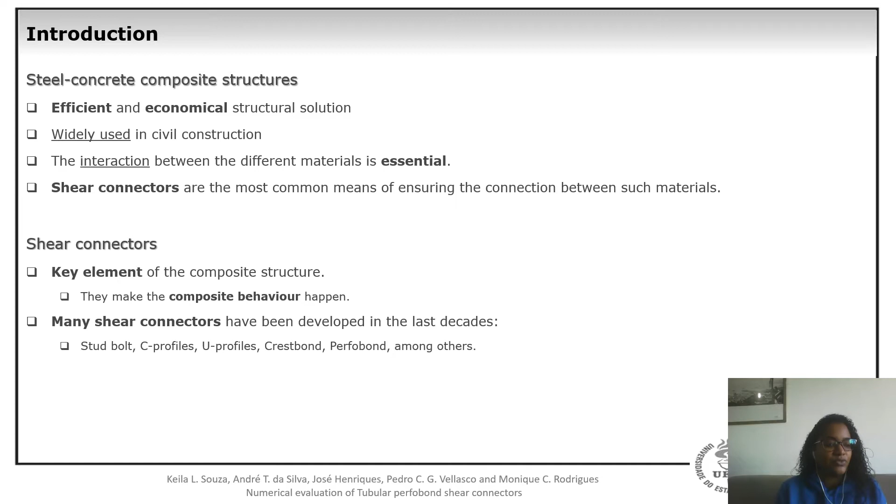They are key elements of composite structures, as they make the composite behavior happen and minimize the slip between the materials. These connectors, which must resist the relative slip and uplift between the concrete and the steel, can have different geometric shapes. Many shear connectors have been developed in the last decades, such as stud bolts, C-profiles, U-profiles, crestbond, perfobond, and C-perfobonds.

The perfobond connector was conceived and has stood out. It is known to have greater rigidity and resistance, however sometimes it doesn't present adequate slip capacity. There is a need for an alternative connector to the perfobond that can achieve adequate slip capacity, as recommended by Eurocode 4.

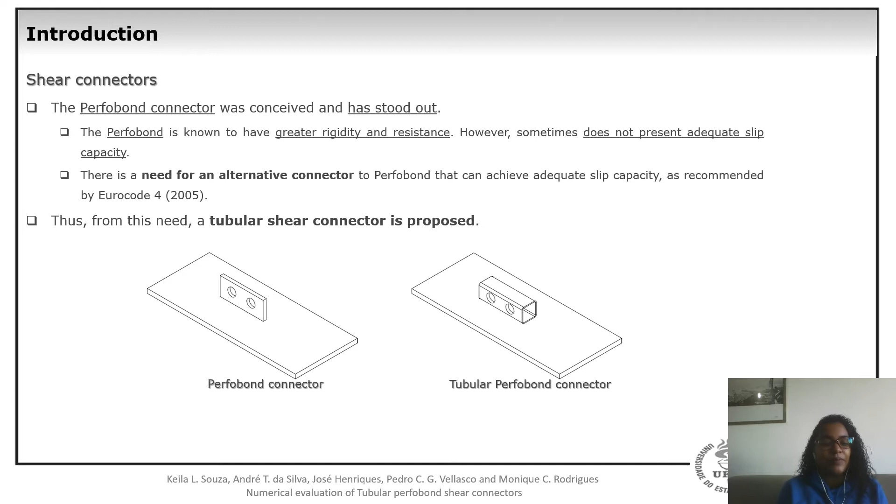Thus, from this need, a tubular shear connector is proposed. It is expected that a tubular cross-section can optimize the connector performance, and the proposal is that the concrete confined inside the connector provides a greater slip capacity when compared to the regular perfobond connector.

As no results of a connector similar to the one proposed here were found in the literature, a validation of the numerical model will be carried out from the results of the perfobond connector of Vianna, in order to validate the model choice. Among all the models studied by Vianna, the perfobond connector with two holes was chosen for the numerical validation.

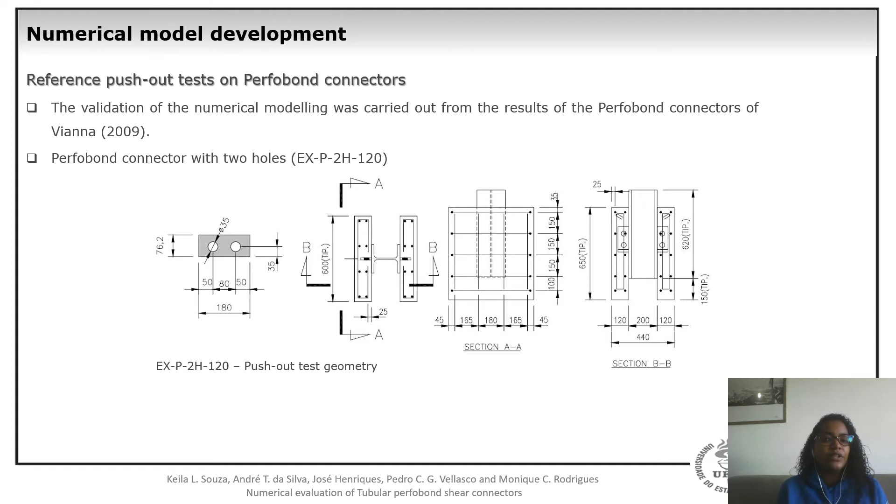Development of the numerical model. The study was performed in Abaqus 6.14, and the explicit solver was used to conduct the nonlinear numerical analysis.

About the geometry, the experiments performed by Vianna were based on Eurocode 4, and all components were modeled with solid elements. The load was applied by displacement on the I-profile section upper face, and the boundary conditions were defined as restrictions to the displacement in the three directions of the global axes.

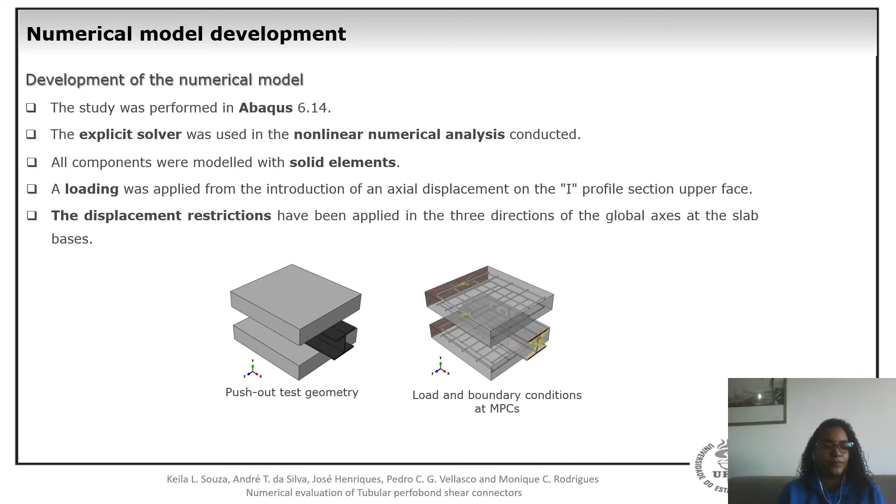About constraints and interactions: the embedded constraint was applied to simulate the interaction between the reinforcement bars and the concrete. The tie constraint was applied to simulate the weld between the shear connector and the steel beam. The normal hard contact and the tangential contact behavior were applied to avoid overlapping between the parts during the simulation.

About the mesh, all the components of the model were discretized with 3D elements of type C3D8R, with an overall size of 5 mm for the shear connector, 24 mm for the reinforcement bars, and 8 mm for the slab and steel beam.

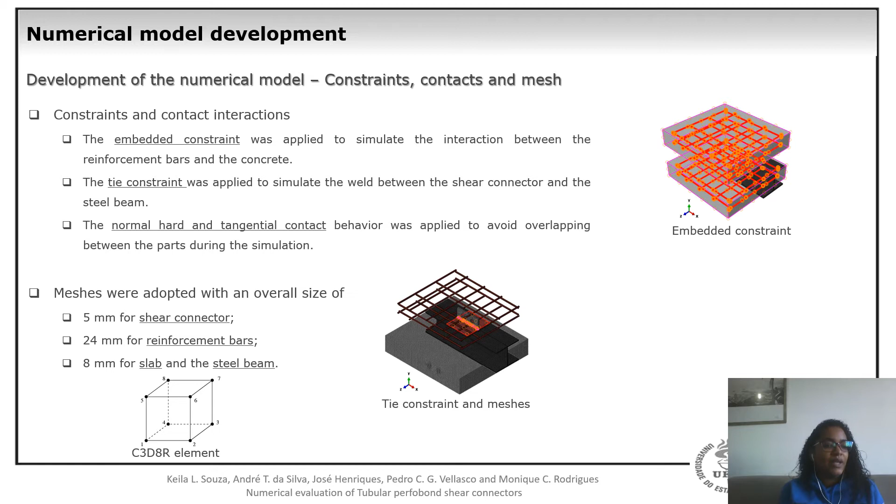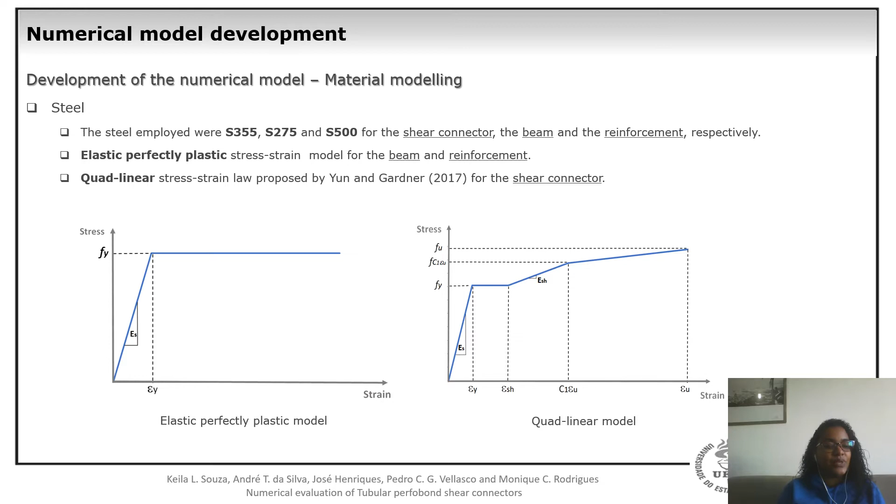The elastic perfectly plastic stress-strain model was applied for the beam and the rebar. The quadrilinear stress-strain model was applied for the shear connector. The concrete was modeled using the concrete damage plasticity model.

The concrete strengths employed were 28 and 52 megapascals. The constitutive model proposed by Pavlovic was adopted to characterize the behavior of concrete under compression, and the bilinear tensile model recommended by Model Code was adopted to characterize the behavior of concrete under tension.

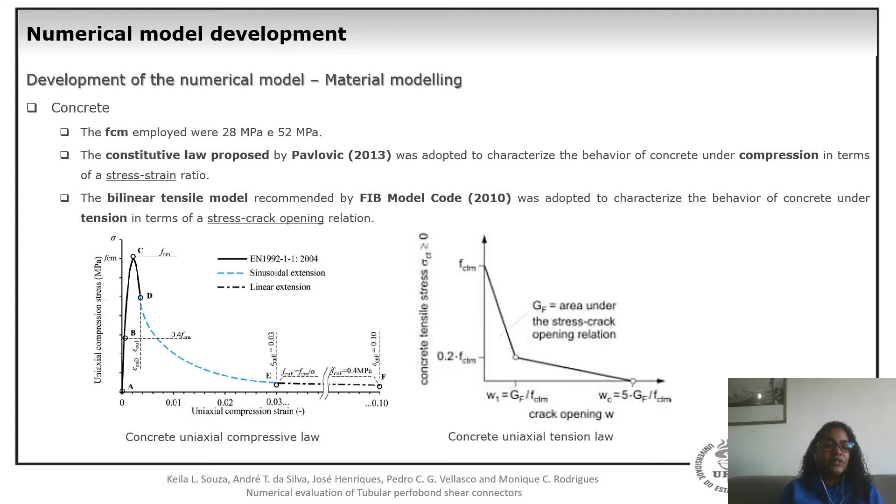Analyzing the validation results, two models of the perfobond connector with two holes were analyzed with 28 and 52 megapascal concrete. About the models, NUM is used to indicate that they are numerical models, and EX that they are experimental models.

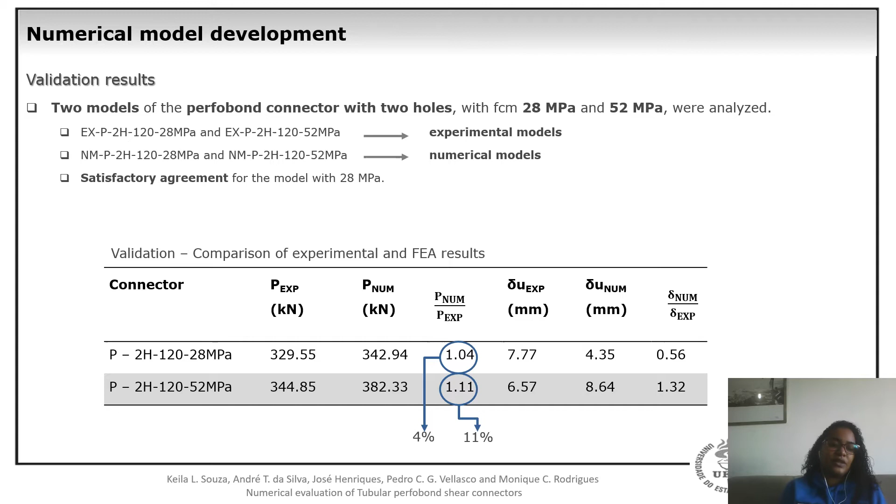The numerical model with 28 megapascal presented an ultimate load 4% higher than its experimental counterpart. The 52 model obtained a 11% higher ultimate load when compared to the experimental one. So there is a satisfactory agreement for the model with 28 megapascal, and this numerical model presented an initial stiffness similar to the experimental one.

After reaching its peak load, the numerical model lost stiffness faster, which justifies the lower slip capacity. The 52 megapascal numerical model lost stiffness lower in the post-peak segment, resembling the experimental one. The 28 model was validated in terms of peak load and the 52 in terms of post-peak behavior, but it is important to mention that other studies are needed to improve the validation.

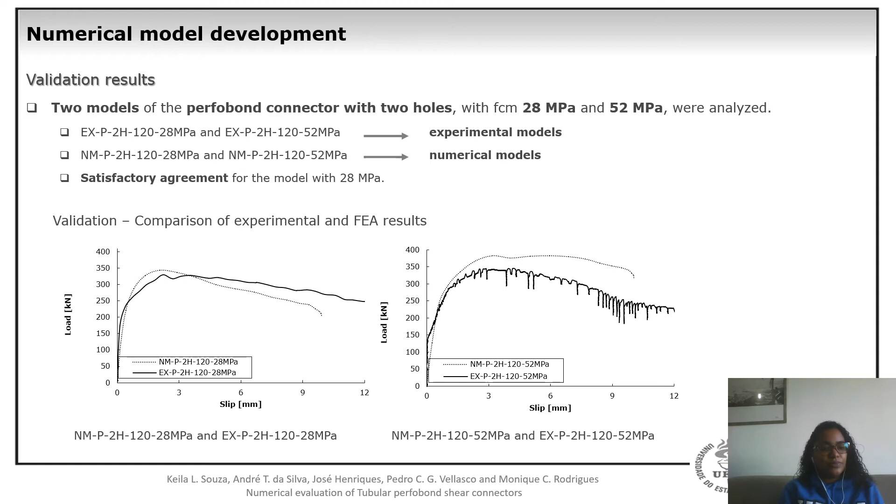Evaluation of tubular perfobond connector.

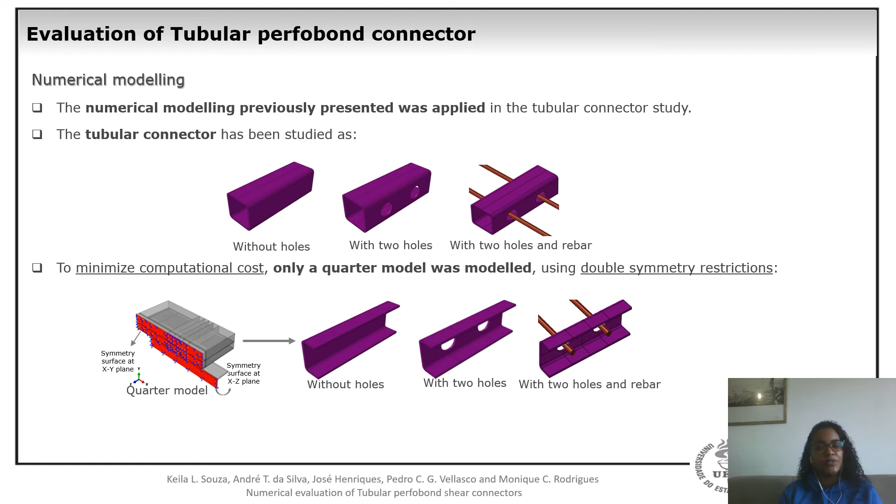The numerical model shown before was applied in the tubular connector study, including materials, constraint, contact, boundary conditions, mesh, among others. The tubular connector has been studied as without holes, with 2 holes, and with 2 holes and rebar. To minimize computational costs, only a quarter model was modeled using double symmetry restriction. Two concrete strengths were studied, 28 and 52 megapascal. The influence of the hole and the rebar were also evaluated.

About the models, the TP index indicates tubular perfobond. The NH denotes that the connector has no hole, 2H denotes that it has 2 holes, and PR denotes that it has a rebar. 28 and 52 megapascal indicate concrete strength.

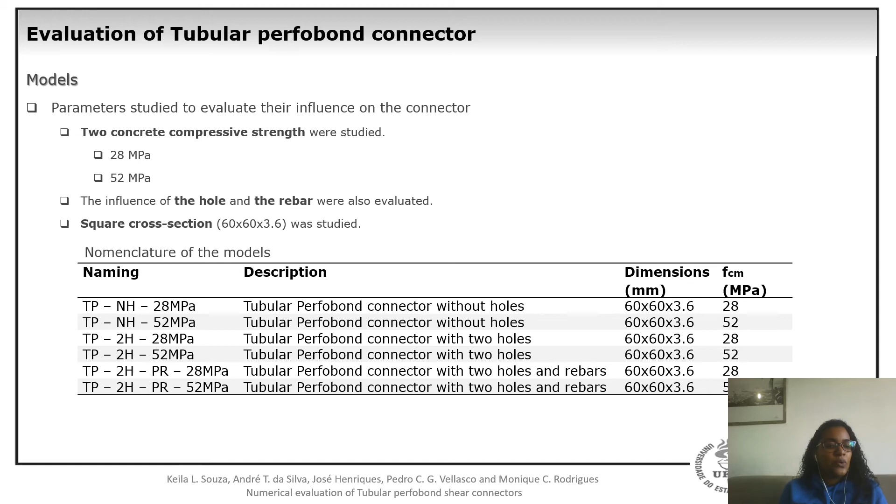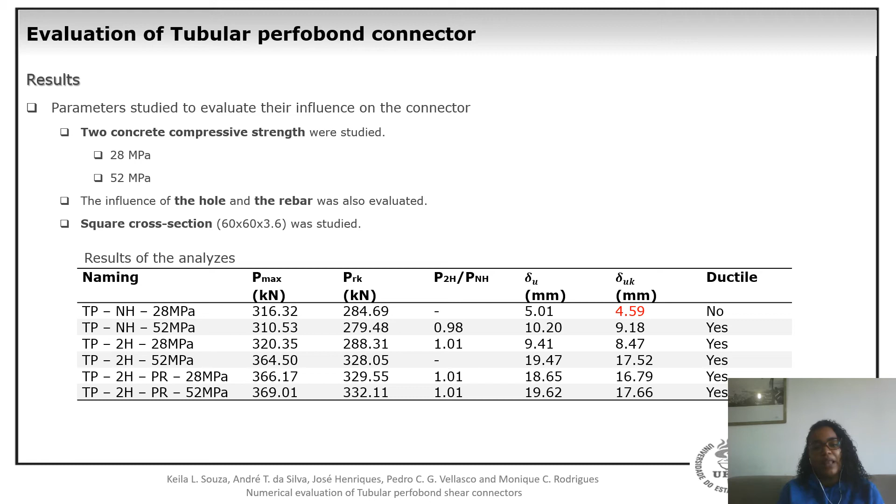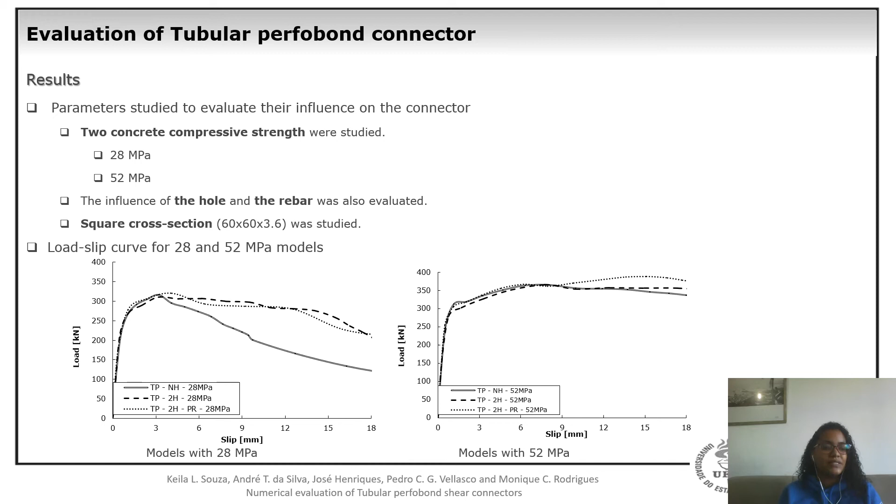About the results, all results were taken according to Eurocode 4. About ductility, Eurocode 4 defines that the shear connector is ductile if its characteristic slip capacity is at least 6 mm. Thus, only the first connector without holes were not ductile. The use of the holes and the rebar led to increasing the shear strength of the connectors. With the exception of the no-hole with 28 megapascal, all models exhibit ductile behavior after the ultimate load.

The use of the hole and the rebar conferred a discrete increase in the resistance. For all models, it led to connector peak load equal or higher values. The increase of the concrete strength resulted in an improvement of the shear connector strength for the different case studies, ranging from 15 to 18%.

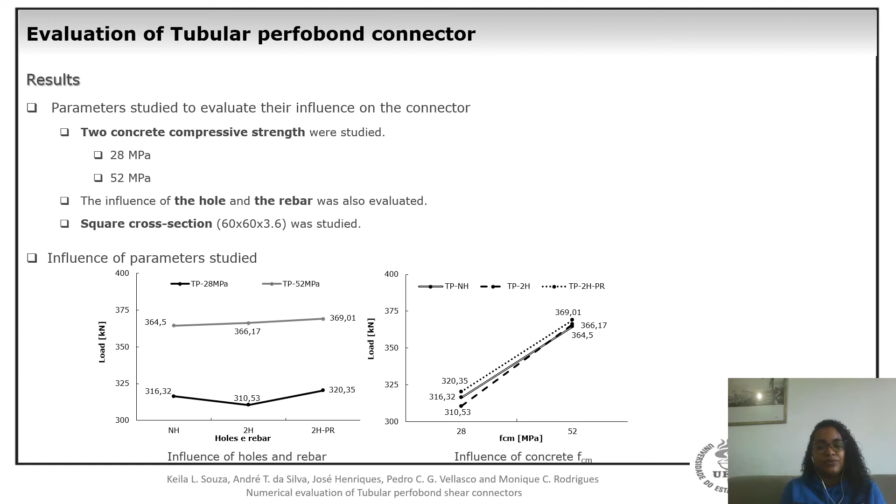There was an expressive increase in the slip capacity of the tubular shear connector due to the rise in concrete strength. The variation in the strength of the concrete didn't influence the steel yielding, only the concrete crush pattern.

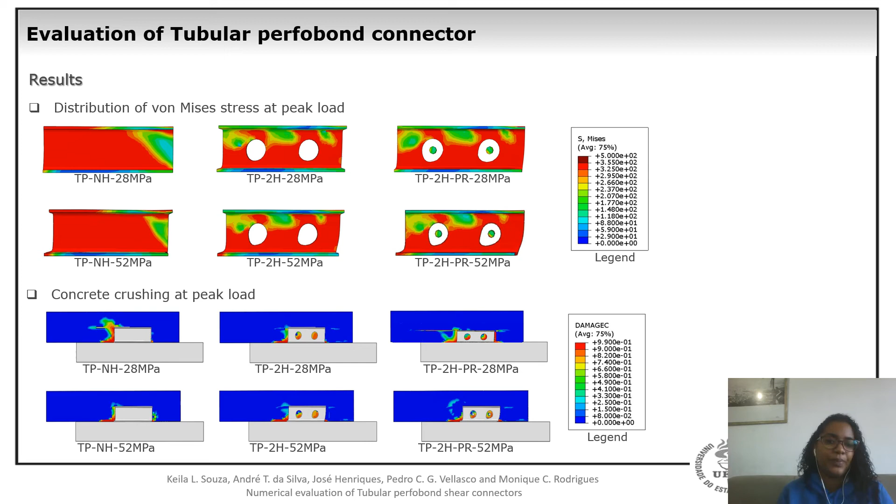Tubular perfobond connector versus perfobond connector. About slip capacity, the proposed connector presented 182% more than the perfobond connector for the model with 28 megapascal, and 98% for the model with 52 megapascal.

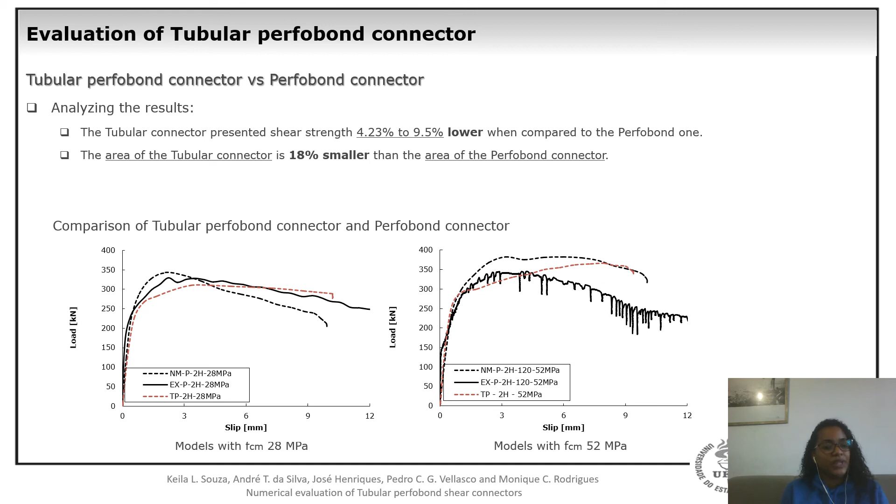The tubular perfobond connector presented shear strength 4% to 9.5% lower when compared to the perfobond one. However, the area of the tubular connector is 18% smaller than the area of the perfobond connector. Thus, the proposed tubular perfobond connector has as strong a potential as the perfobond connector.

About the conclusions, the model validation indicated that the numerical choice led to an adequate calibration in terms of ultimate load. However, it is still necessary to study the post-peak behavior to increase the connector ductility, as observed in the experimental program.

About the tubular perfobond connector, the presence of the holes and the rebar contributes to their post-peak ductility for the models with concrete strength 28 megapascal.

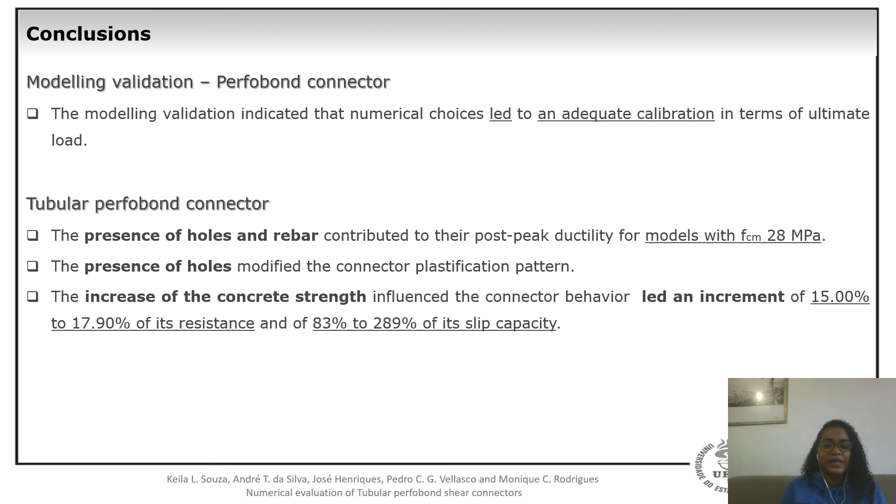The presence of the holes modified the connector yielding. The increase of the concrete strength influenced the connector behavior, leading to an increment of 15 to 18% of its resistance and 83 to 289% of its slip capacity.

Except for one no-holes connector, all the proposed connectors could be considered ductile by Eurocode 4. It is important to study new parameters and conditions, but this tubular connector proposal can be considered feasible.

Compare the tubular perfobond connector with perfobond connector. The tubular perfobond connector reached the desired ductility, presents excellent post-peak slip capacity. The use of the tubular perfobond connector discreetly decreases the concrete crushing propagation for models with both concrete strengths.